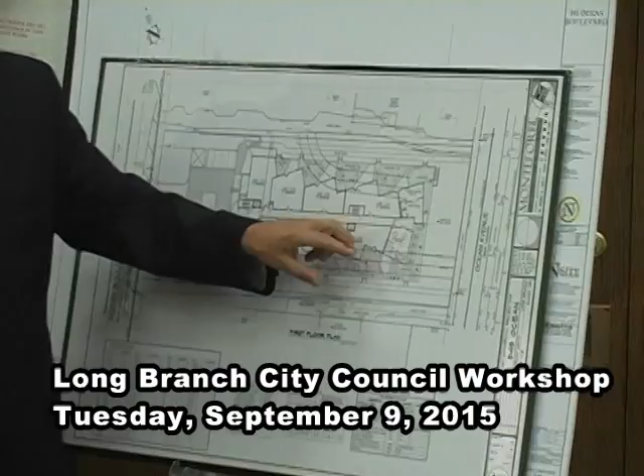The building steps up, starting over here. These units start... I could go to the roof plan, but actually it'll be easier to describe in the rendering.

This is a concept rendering of how the building would look from the street on Ocean Boulevard. What we're doing is terracing the units from this southeasterly corner, and they stagger the stepping as they go up the building, creating kind of an Italian-esque mountainside where you see all the houses step up the mountain.

There's this trellis piece that grows out of the ground and comes up the center, like a line up the middle of the building, and all of the terraced units have these trellises that come out and cascade like a waterfall down the center of the building, all the way to the ground, then go up through the building and back down the Ocean Boulevard side of the property.

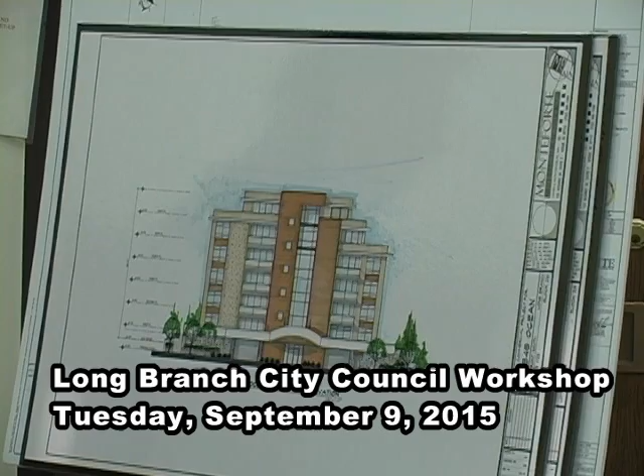On Ocean Boulevard, you can see on this elevation, the trellises come from the main entrance door, travel up the building, across the back, and all the way down. On the last page of the handout, since it's hard to understand what these trellises look like, there's a page with similar louvers and trellises to give you a flavor of the idea we're going for.

Unit sizes run from around 1,300 square feet to 2,400 square feet. They are 2- and 3-bedroom units, 40 of them total. We have 81 cars: 10 of them are on the entrance courtyard, and the rest are inside the building.

I can also do a brief on that level. At the lower level, it's kind of interesting - the property actually goes up from Ocean Boulevard, quite a bit, like 8 feet. So when you come in at Ocean Boulevard level, the Ocean Avenue level is up higher, burying the whole level of the garage. However, when you pull in at the Ocean Boulevard side, you're actually driving straight into the garage, almost at grade, a little lower than grade.

Our main lobby is there, and that travels up the building. Circulation goes right around in a single direction. And then there's storage units coming off the beach, with access from the beach directly to the storage units.

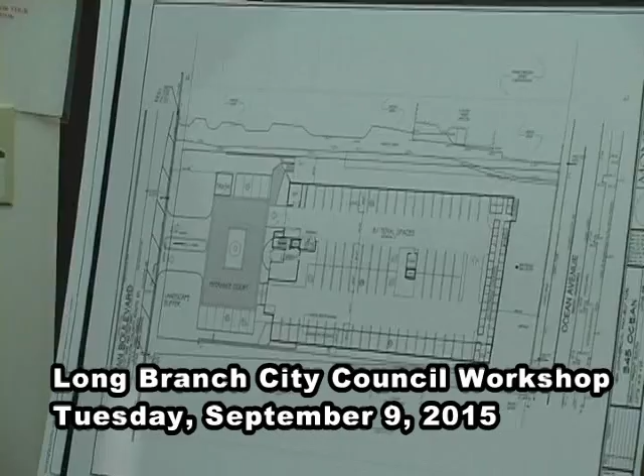Every unit is designed to face the ocean, so that's why you see the shape that I have created here. All the units tip out and have balconies that face the water side, and then they build up as they go up the building.

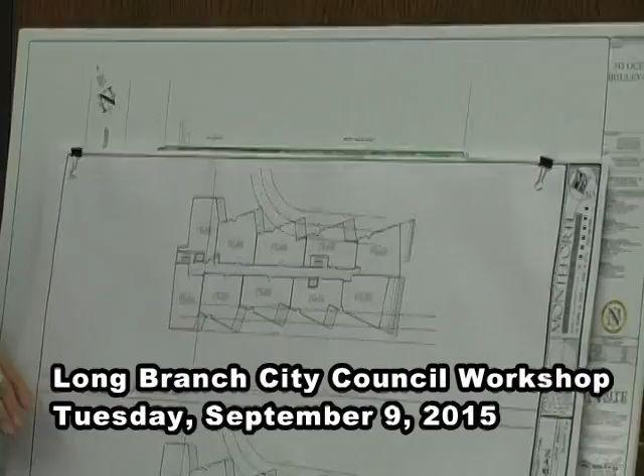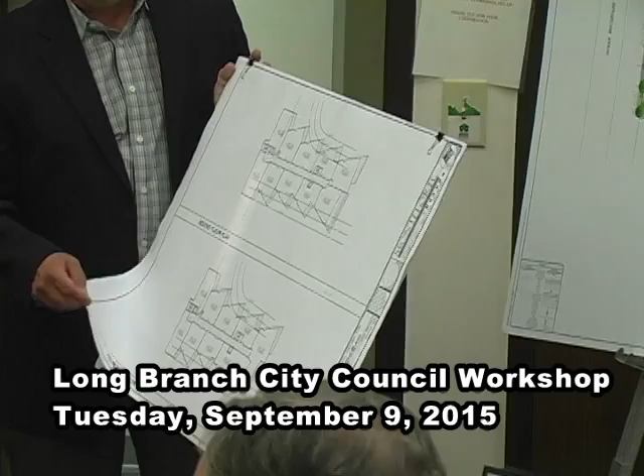If you want to go through your packet, you can see how the building steps up. On your drawing, there are dashed-in lines showing the heights of the building at those specific areas relative to the setback of the property line, which is how we created the height of the building. The building steps up into the middle, and as you go up, you can see how they start becoming terraces with balconies. The next level, they step back again, so it's constantly tiering up in a staggered format.

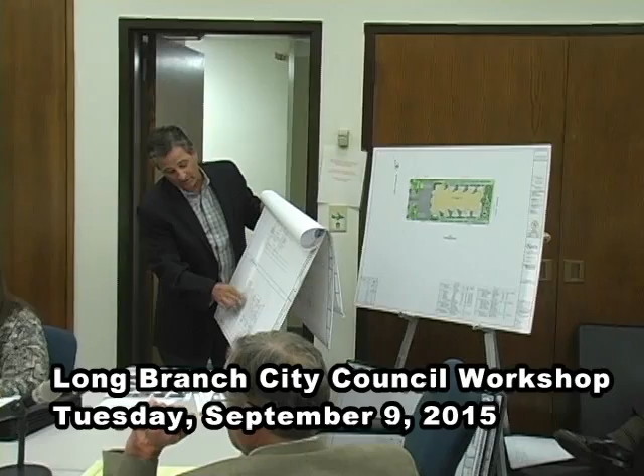Down at the bottom would be the roof plan, and you can see all the trellises kind of coming down the building, and then they end up on the ground.

What's the highest floor with housing? The 6th floor is the highest level, and there's two penthouse units at the top level.

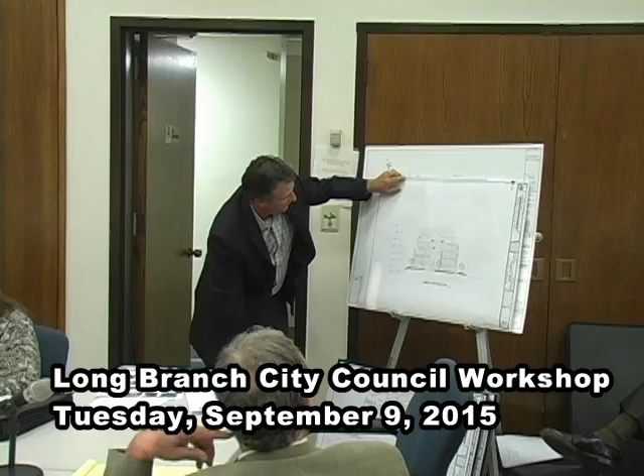3-bedroom units. What's the height of that building? The building is, taking from an average grade of 24, 66 feet from average grade. The front of the building is around 20 and the back of the building is around 30.

Now, you talk about trellises. Trellises usually have greenery. Are they going to have greenery, or are they just going to be the wood? They're just the wood trellises as shown in those pictures, really shading devices.

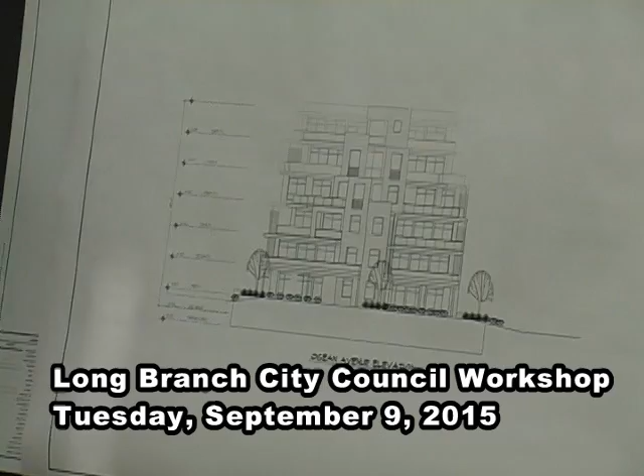The ones that are along the sides of the building are kind of facing back, trying to focus the views towards the ocean. The trellis runs all the way down the sides of all the balconies to give them privacy from the neighboring units, and yet to focus their views out towards the ocean.

And you did say every unit will be oceanfront? Every unit will have a view, yes.

The only other thing that we're working on, with Mr. Pratap, is the facade treatments. We're talking about using stone, like a cast stone or a limestone facade, and we're using architectural metals. We're also going to be using some regular stone at the bottom, because we're trying to get the building to grow out of the ground. So the base is kind of this stone base.

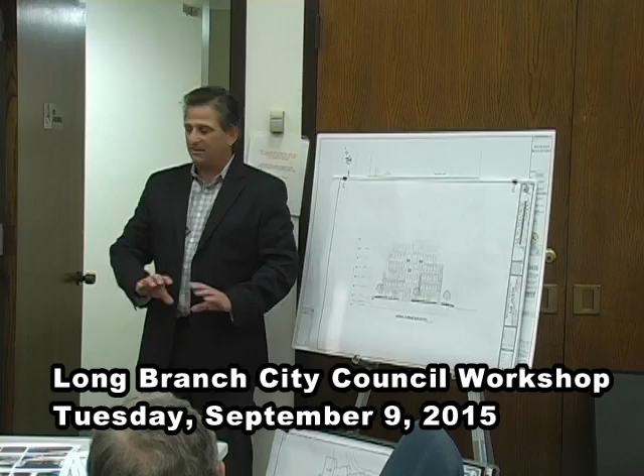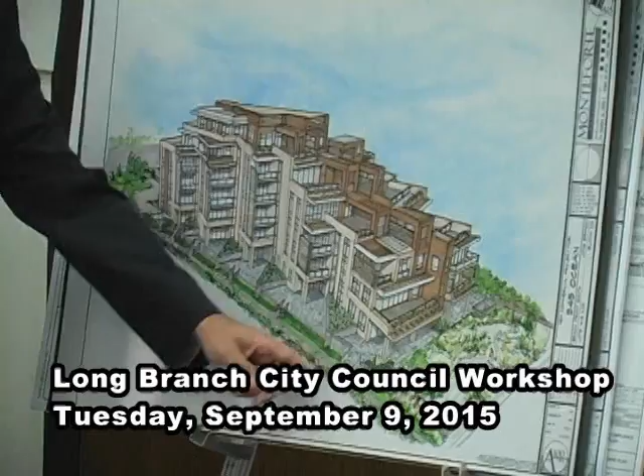You can see here that the lower level units have all these nice terraces, and then there's a little stone piece with these trellises that divide the units up. There are two beach walks, one on each side, so you can come out of your unit and walk down to the beach. Also, the front is bermed up so that from Ocean Avenue, you don't see anything but the lawn going up to the level of where people are sitting.

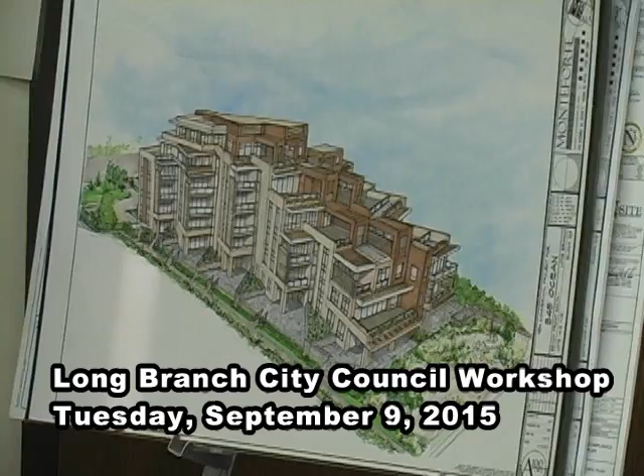The roof on that, is that open to the residents, or is it just strictly a roof? This up top is a roof, the very top of the roof. At this point in time, I haven't explored that. There's nothing up there for guests at this time.

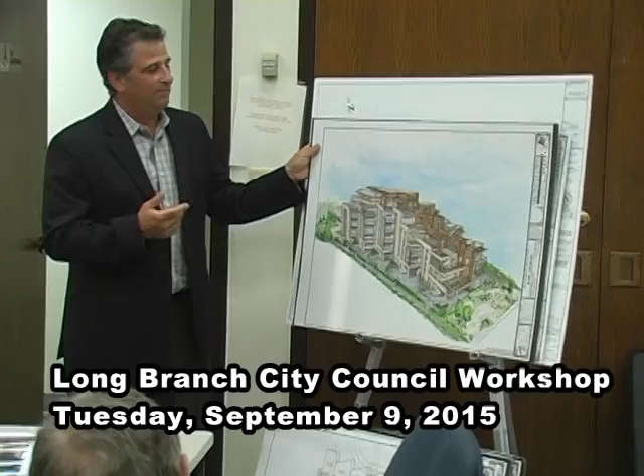Jim, are you going to propose a landscaping plan for the open space? Yes, we have Jason here who did the site, he's working on the site plan. We are working on tweaking the landscaping, so I'm not sure at this time if it's appropriate to go through all the landscaping. I'm sure he can go over it with you.

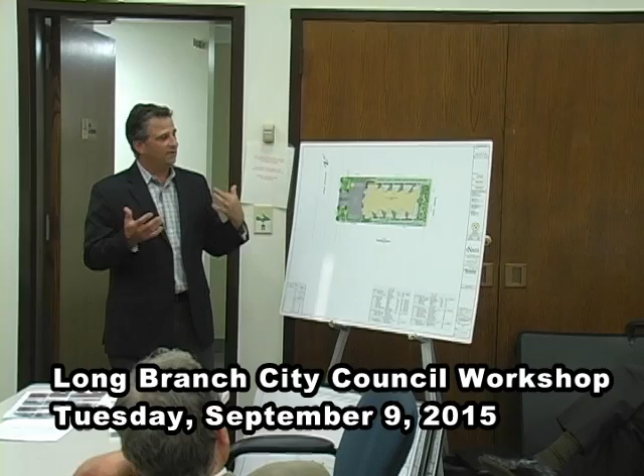You can see on the Ocean Avenue side, we have many plantings. It's very seashore planting style with lots of dune shapes and grasses, similar to other projects that we've proposed in the past.

And then on Ocean Boulevard, we're going to try and continue the theme of the Ocean Boulevard landscaping according to how it was approved. So that's a generalized plan, but materials that we're going to use will all be determined between you and Pratap and other consultants.

Yes. Any plans for a pool? No, there are no plans for a pool.

So, but generally, the plan is in compliance, but we mentioned that there might be a requirement for a utility transformer in the area that the utility company designates. And you're concerned about that being within the 50 feet because of an adjoining property that you developed, is that correct?

I'm not concerned about it. We've done it on other projects. You're reporting that that's likely. On the Feliciano project, that's on North Bath Avenue, we had the transformer up front in the berm, and it's hidden by landscape.

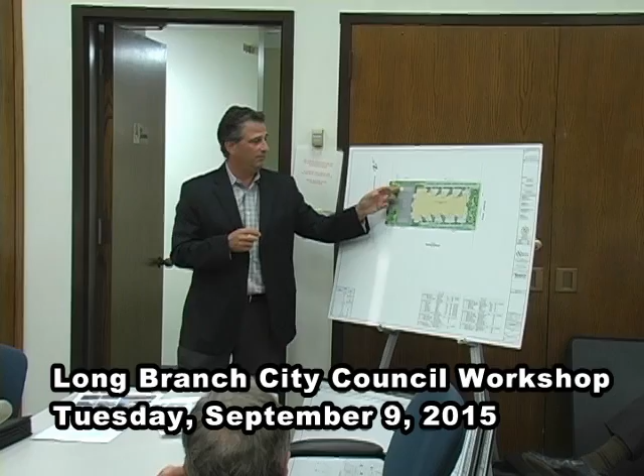Then you'd landscape around it, established. Can you go into that a little more detail so I understand? There's a 50-foot setback, and in addition to the landscaping, the utility company is likely, hasn't done it yet, is likely to require that it be located in a specific area for their service and requirements.

Within that piece, and what Jim and Jason had mentioned earlier to me was they expected, like another project, that they would put it in that area because of Ocean Boulevard. So it would be in that area and have to be landscaped around it. But since it would be a waiver, I wanted to bring that up—it hasn't been determined yet, but it's very likely.

Planning board deals with those on a regular basis, and the city engineer will review it with the applicant's engineer at the planning board. It's nothing unusual, and it's nothing that hasn't happened in many other cases, and I'm sure the council president who serves on your planning board will be able to attest to that.

I think that's it for me. Yeah. Any more questions? Okay, thank you very much.

Thank you. Now, I also have Jason Fichter here as our project site engineer, but I don't know that there's any—if you have any questions, we can of course answer them, but is there anything particular you need to add to this planning process, Jason?

The only thing I really wanted to bring up tonight was the potential deviation for the utilities within the buffer from Ocean Boulevard. That's been covered. And just a general idea of the landscape plan, and that's been covered. So if there's anything else you'd like to know, I'd be happy to answer your question.